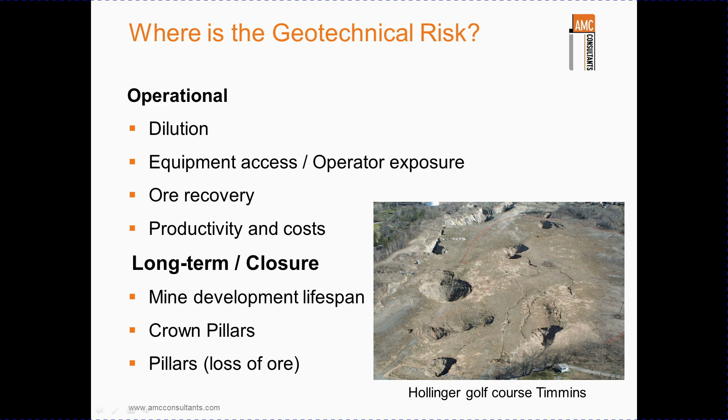I have split the application of risk into two categories, operational and long-term, which includes closure. Operational risk involves such things as dilution, equipment selection, ore recovery, and productivity, including costs. Long-term risk involves such things as mine development lifespan, crown pillar stability, and possible loss of the mine reserve in such things as pillars. The photograph on this slide shows the Hollinger Golf Course in Timmins, Ontario, which is in Canada. This area was impacted by the collapse of crown pillars left above narrow vein gold mining.

So where is geotechnical input required? The answer is essentially throughout the life cycle of the mine. As with any project, laying the foundations for good input is essential, and we will be covering this aspect in more detail. Good geotechnical input is needed when the project is at all stages of study, from the preliminary economic assessment right through to the feasibility and detailed design stages of the study. Good geotechnical input is also needed at all stages of mine planning, from the life of mine plan right through to the short-term planning aspects.

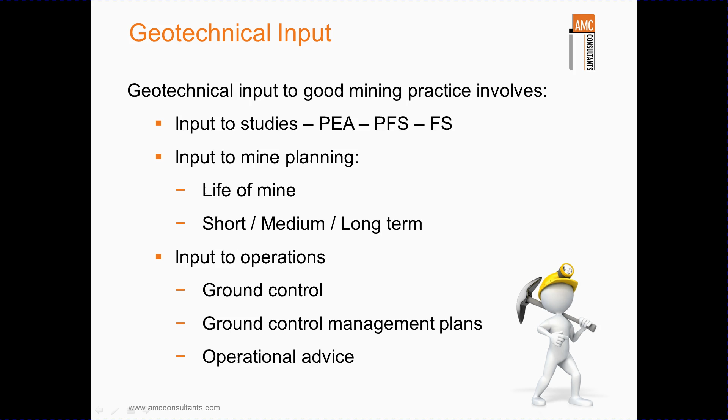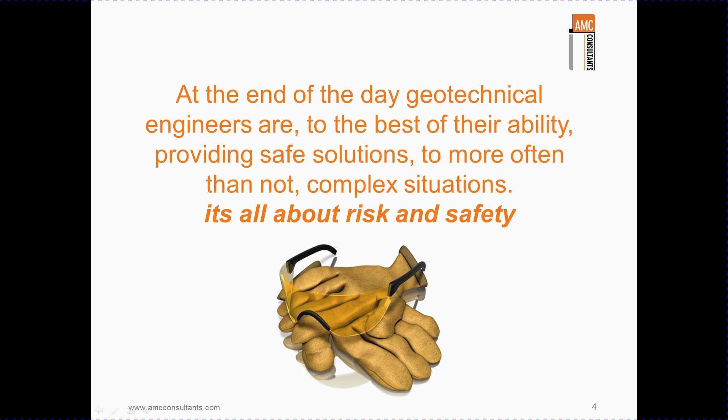Good geotechnical input is also needed during operations, when looking at ground control designs, providing management with effective ground control management plans, and in detail when operational advice is required. I like to emphasize that at the end of the day, geotechnical engineers are, to the best of their ability, providing safe solutions to, more often than not, very complex situations. It's all about risk and safety.

An all too frequent dilemma, however, is from the question, do we really need to heed geotechnical advice, especially if it compromises our production or reserve? In my opinion, the answer is yes. We do need to heed this advice, and if we don't, then the consequences can be extremely adverse. However, I do agree that geotechnical risks and consequences should be assessed and prioritized so that informed decisions can be made.

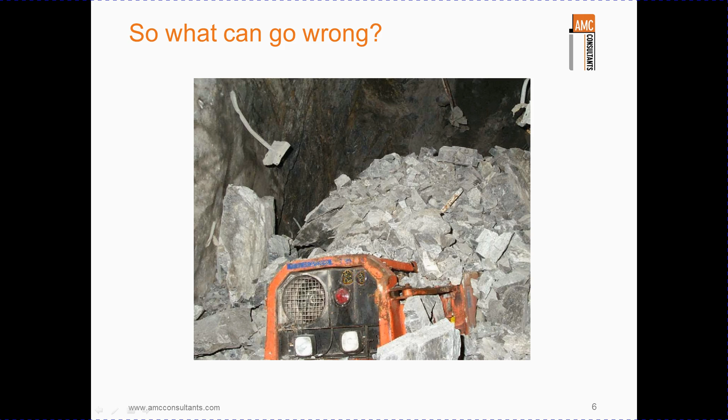So, what can go wrong? The following photograph was obtained from the internet and is indicative of the sort of risks that can occur. Of course, this is a buried scoop in a stope.

Okay, so rock can be difficult to engineer. Why? The answer is that rock is impacted by mining in a number of ways. Firstly, rock is a highly variable material in the first place in terms of strength and because of inherent discontinuities such as geological structure. In addition, mining is dynamic. In fact, it's a very dynamic process. We are constantly changing conditions, for example, by blasting. We create damage zones around excavations from blast fracturing. From stresses, we change the stress regime within a rock mass when we excavate material.

The air itself can be a changing factor. Air from ventilation can degrade rock strength through the process of slaking. And of course, water. Water from drilling, as well as groundwater, can impact rock strength and can also lubricate geological structure, for example, which can lead to failure.

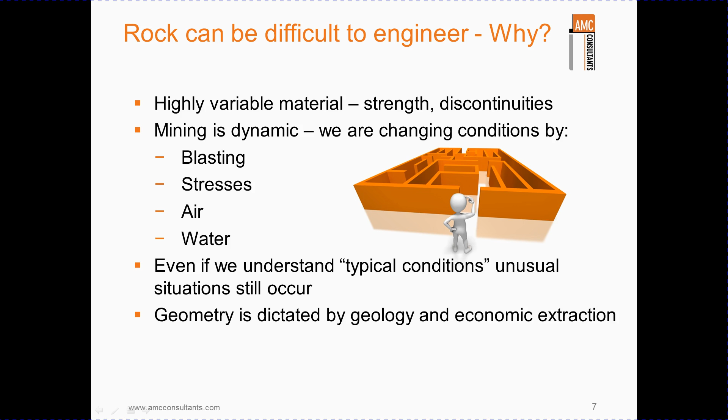It is important to understand that even if we understand typical conditions, unusual situations still occur in mining. For example, where we intersect major faults or where the alteration zones may impact the characteristics and behavior of certain areas of a rock mass. Also, the geometry of an excavation is often dictated by geology and the requirements of economic extraction. This aspect will be covered when we look at rock stresses.

Okay, so what do we need to provide good geotechnical input to narrow vein mining projects? The answer here is that good geotechnical information, and I stress good information, is needed throughout the life of the project. The process should begin with good early data collection, and this should include geological, geotechnical, and hydrogeological information. This data should be collected well, organized well, and presented well, and should have been validated through a defined and auditable process. This data is then used for subsequent analysis and often is used to provide input to rock mass classification and numerical modeling.

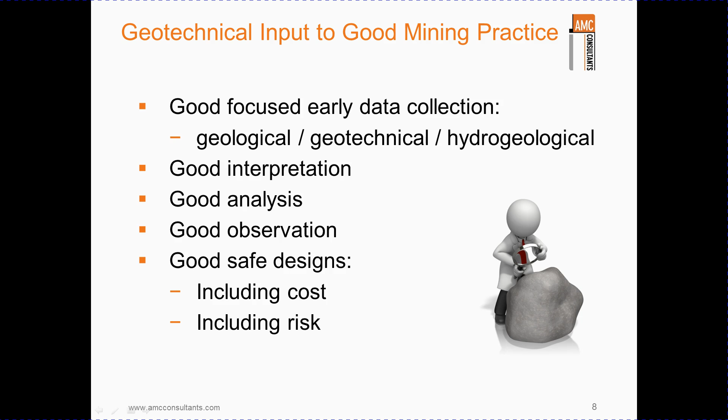I've also mentioned good observation. This aspect is often overlooked in the often schedule-driven data collection phase. By good observation, I mean using all available information from such things as rock outcrops, existing excavations, road cuts, and the like. All of this will then lead to good safe designs, which will include factors of safety and risk. These factors need to be justified and defendable.

Okay, so we have collected some really good data, we have assembled the data, and we have prepared a geotechnical model and some good defendable inputs to geotechnical tools that can assist us with the mine design. Now we have to ask ourselves, what elements of the mine design should we be focusing on? Where is the risk? I think we should have a good understanding of any potential surface underground interactions, such as between an open pit and underground operation.

We should try to gather information about rock stresses, as often this information is difficult to obtain with any certainty until underground operations are well advanced. For example, have there been borehole breakouts or core disking observed during exploration drilling? These can be identified by using tools such as televiewers or by good inspection of the core. This information is then used for mine planning, which will need justification of such things as interlevel distances, standoff distances, extraction sequencing, pillar sizing, dilution, and backfill design.

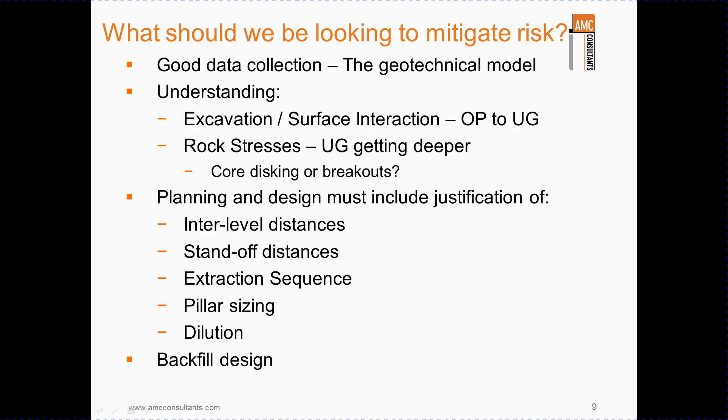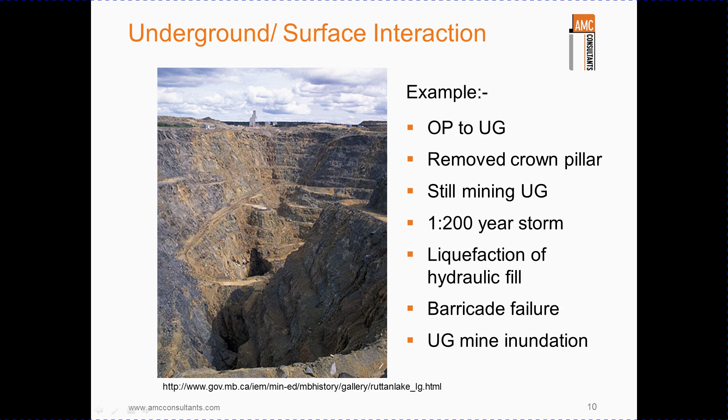When looking at underground surface interaction, I've put in this example, which is from the Ruttan mine in Manitoba. In this instance, the crown pillar was removed prior to completion of underground mining, and this is shown in the photograph here. The region experienced an exceptional storm event which led to the inundation of stopes with water. This led to liquefaction of the hydraulic backfill in the stopes and subsequent barricade failure. This in turn led to inundation of some of the underground workings with backfill. The lesson here is the timing of crown pillar removal and possible risks associated with this.

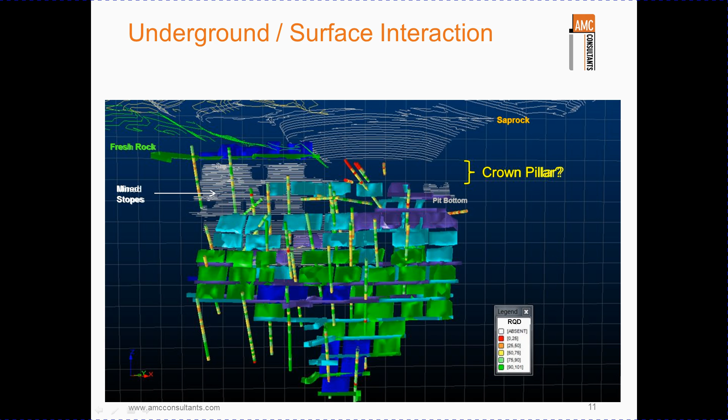This slide shows the transition of a mine from open pit to underground. In this instance, the open pit was in saprock and underground mining of stopes had commenced. A key question would be, what thickness of crown pillar do we leave and what influence will mining have on this? The geotechnical data is telling us that the rock quality in the crown pillar area is not that good. The risks here are that we leave an inadequate thickness of crown pillar. This ultimately will impact both the underground stability, but also possible impacts on the stability of the open pit slopes as well.

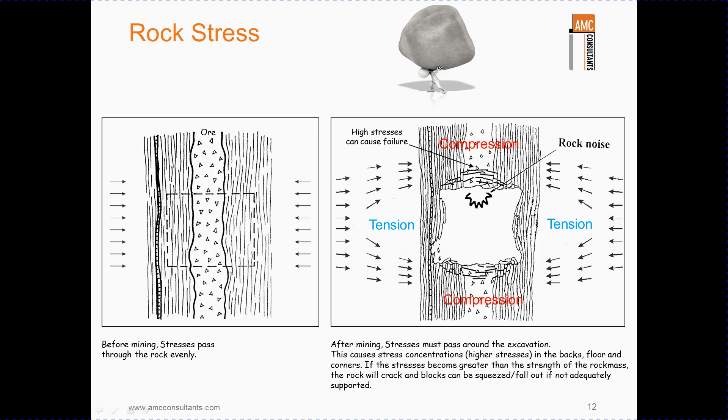As I've mentioned previously, another factor to take into account are rock stresses. These are difficult to determine before you get underground, where you're able to take measurements from the underground excavation. But the key point here is that we do need to understand rock stresses and the impact that they may have on mining. This is particularly true the deeper mining gets. The slide here just demonstrates that a stress regime is altered when excavation takes place, and different areas of the rock mass will either be in compression or tension, and those may change as mining progresses.

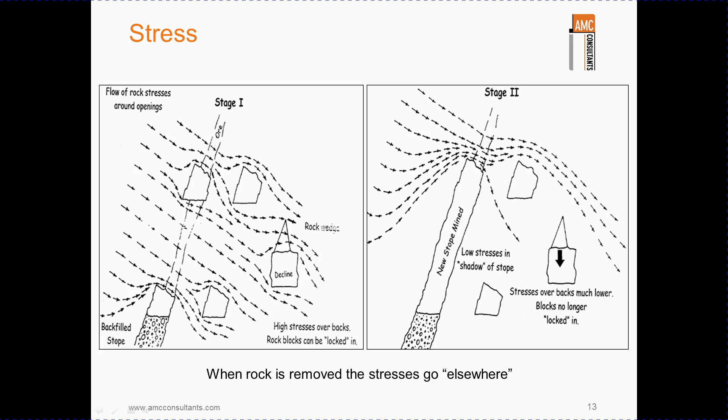And that is shown in this slide here. Essentially, you have some development and a stoping area. You can see on the left-hand side the stresses going through the rock mass. Once we mine a new stope, then stress conditions can change, and in this instance, in the footwall development, we've gone from a compressive regime into a tensile regime. And this can change depending on the sequencing of your stoping, for example. So stress is really a key factor when looking at narrow vein mining.

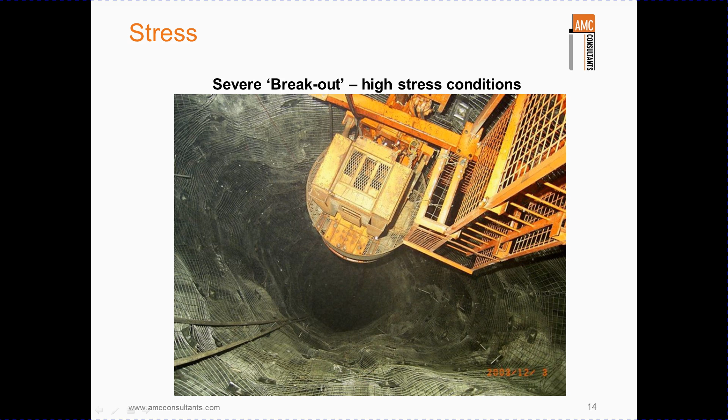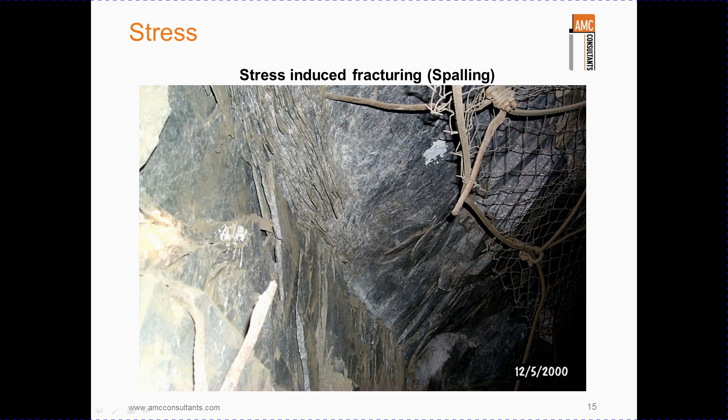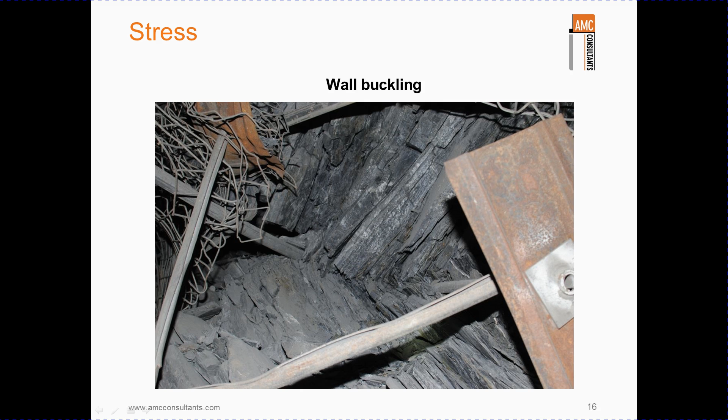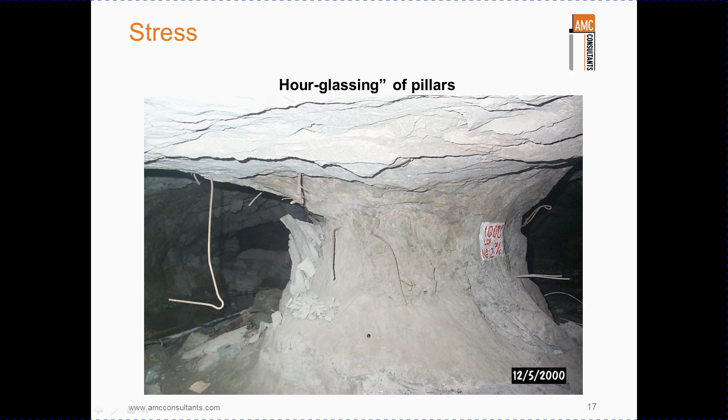Stresses also impact pillars. In this example, we're seeing what's known as hourglassing of pillars. Essentially, that pillar is beginning to fail. You get loss of dimension to that pillar. The stresses then get shared onto abutments or adjoining pillars, and those in turn, if they're overstressed, can lead to further failure. And you can in fact get a domino effect of failure across quite large areas of ground. Of course, that then subsequently leads to serious mining problems.

So what do we need to consider from a design perspective? Key aspects where the design needs to be justified include things like interlevel distances. This is a key parameter that drives stope stability, which is difficult to change once it has been set. Standoff distances, which is the distance from stoping to the major infrastructure, such as ramps. If we get that wrong and you get excessive impacts on that development from the mining, that can lead to expensive rehabilitation.

Extraction sequencing. This is essentially the scheduling of stopes. This needs to be done with the effects of stress taken into account, normally using numerical modeling. So it needs to be an iterative method where designs are made. You have a look at the impacts on different stoping sequencing and see what impact that has on the stresses and how things like the footwall development is impacted. We need to look at pillar designs for the crown, sill or rib pillars, for example. And again, these need to be based on defendable geotechnical inputs.

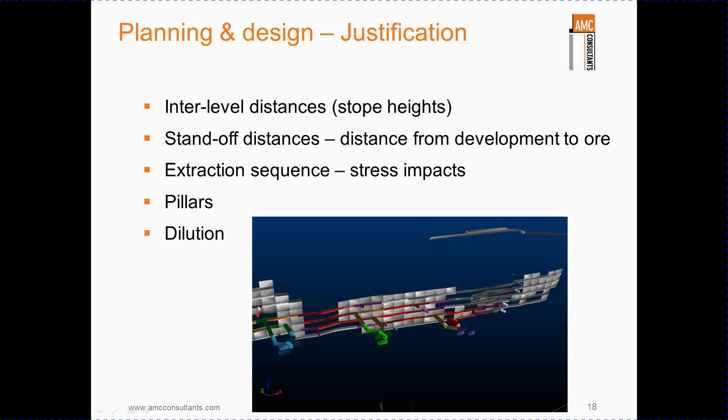And as I've mentioned previously, dilution certainly needs to be considered. Dilution can be complex. There are various things that need to be taken into account, not only geotechnical but also mining. For example, blasting, how efficient and effective your blasting is will certainly impact your dilution. So all of these factors need to be taken into account when looking at mining of narrow vein ore bodies. That's the end of this very brief webinar. I hope I have provided some basic information and some items for thought when it comes to thinking about geotechnical risk for narrow vein deposits.